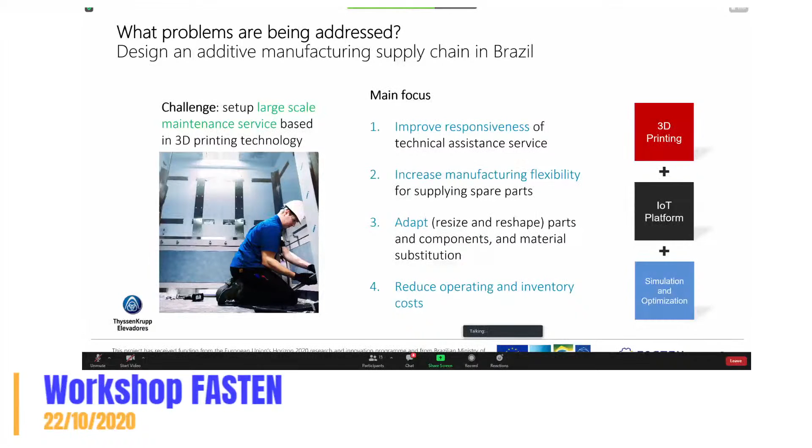That's very valuable in these times when a fast reply to client needs is essential. So for ThyssenKrupp, this is a high-level view of the problem we're addressing. You'll see in Professor Mauro's presentation a more detailed definition of the problem and the tools we're developing for them.

In the other use case, from Embraer, we have another perspective on Industry 4.0, mostly related to the preparation of pieces - the kits that will go to the production line. Nowadays this involves a balance between a human and a robotic approach.

And the different point from the ThyssenKrupp use case is the robotic picking. And you will see in detail the problem addressed for Embraer, but also the innovations from these technologies in the following presentations. So this would be all for the moment.

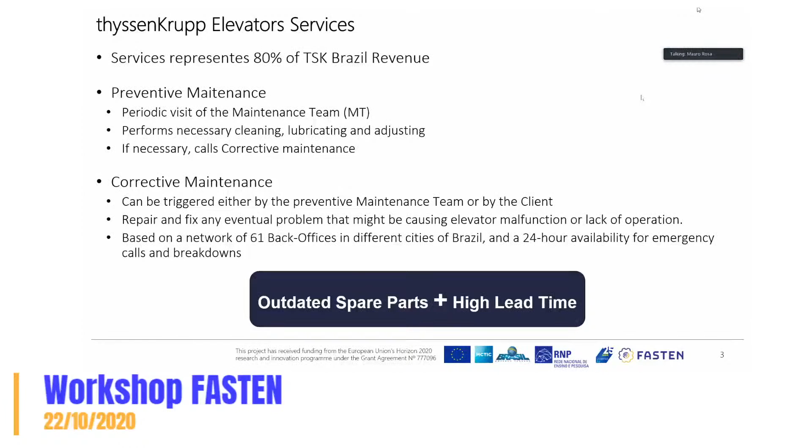Thinking about this situation, we have the FASTEN ThyssenKrupp use case. Here, it is important to present some guiding questions linked to this problem: how to develop or deploy a one-of-a-kind manufacturing system for spare parts with sporadic and erratic demand. This is one of the questions to be answered by the project. How to develop the collaborative robot capable of identifying and picking parts produced in different additive manufacturing printers. We are working with 3D printers, and I will talk a little bit about these technologies ahead.

How to develop an efficient network of manufacturing units capable of providing immediate spare parts availability. This is so important as a question, and it was one of the targets that we have worked a lot on in this project. How to integrate a network of decentralized manufacturing units capable of reducing spare parts supply lead time and costs in a big country like Brazil.

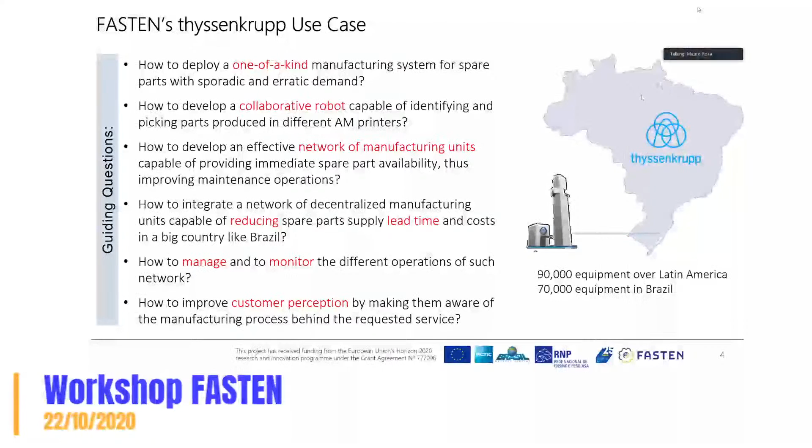Problems faced by ThyssenKrupp following this situation and FASTEN solutions. In this case, we are talking about creating and developing, demonstrating, validating, and disseminating an integrated and modular structure for the efficient production of customized products. In this situation, we are interested in constructing our solution based on these technologies and solutions that we are demonstrating here, based on 3D printers and mobile manipulator robotics. We have developed a SRAM that we will define and talk about in several parts of this event.

Open industrial IoT platform for customer-designed products. All this solution is based on this technology: predictive and prescriptive analytic tool, holistic simulator optimizer tool, and real-time monitoring and performance management tool. These are the basis of the FASTEN solutions for these problems faced by ThyssenKrupp.

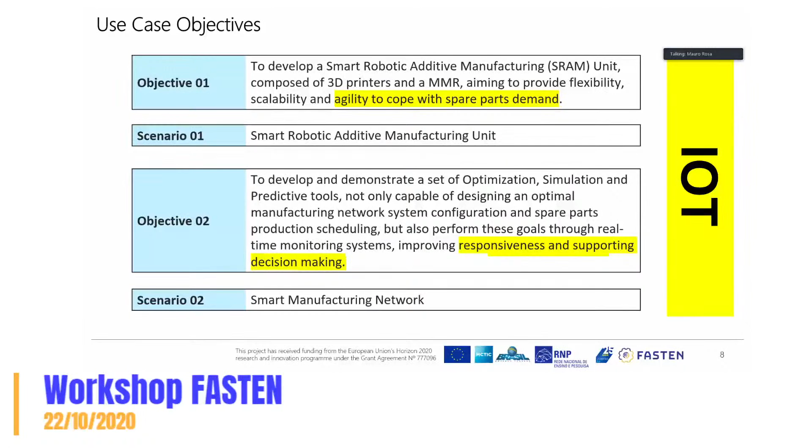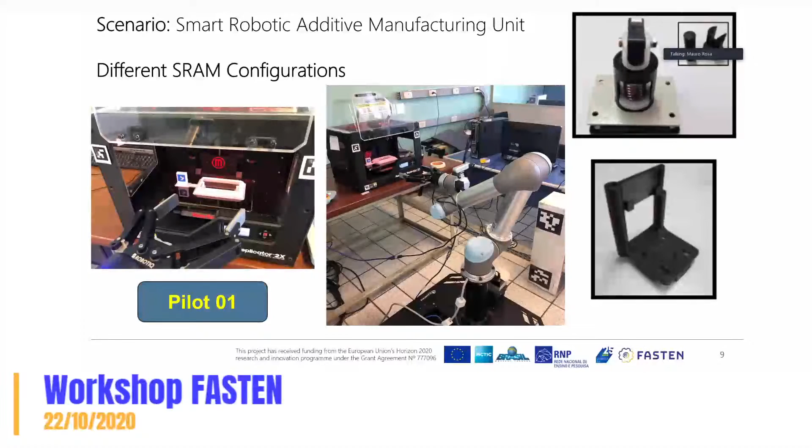And we have designed different kinds of configurations like these pictures that we are showing. Other configurations like itinerant smart robotic additive manufacturing are possible to solve the problem of lead time in big cities. We have studied this kind of solution as well, and a smart additive manufacturing in a more simple way where we don't have robotics, but we have different 3D printers to produce, and the presence of humans here is important.

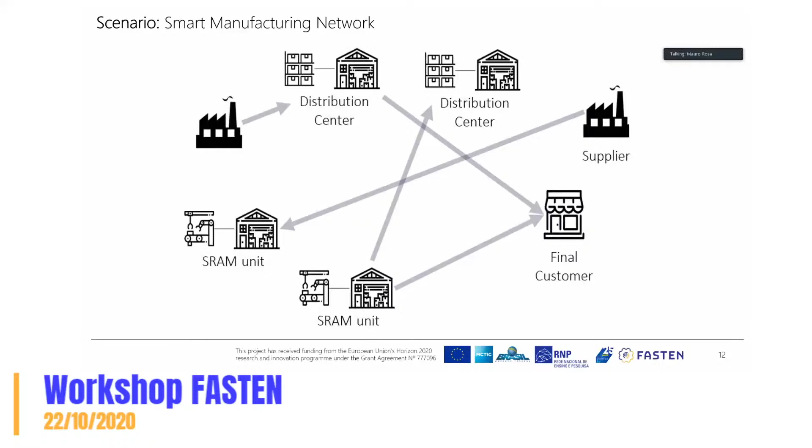The other scenario that we have mentioned during this presentation is a smart manufacturing network. My colleagues will present this situation in detail, but the basic idea here is to have different SRAM units spread in Brazil. We have distribution centers located in different parts of Brazil, and the final customer. This consists of an optimization problem, and we have constructed modules to solve this kind of problem.

In order to illustrate our developments, I have here a demonstration video, and I will ask our assistants to play the demonstration video so the people on YouTube can see it. Okay. Okay, Ariane? So, Mauro, I would like to ask you to stop sharing your screen so I can share mine. Okay.

The sound, I think, is a bit low. Maybe I can comment on some parts of the video in order to clarify what happens.

In this case, a customer has identified broken spare parts and has contacted the maintenance team of ThyssenKrupp. The maintenance man has made a request to Guaíba, where ThyssenKrupp has the manufacturing system, and they have started the process to produce the part that they asked for in order to solve the problem with the elevator. In this case, the perception of the customer is very bad because the lead time is very high.

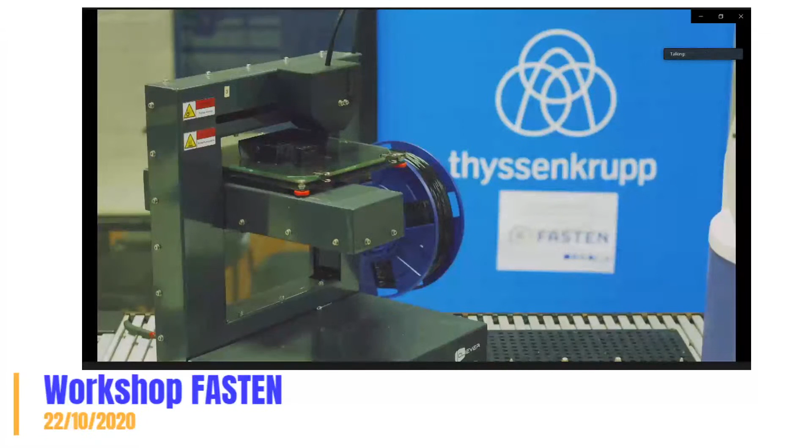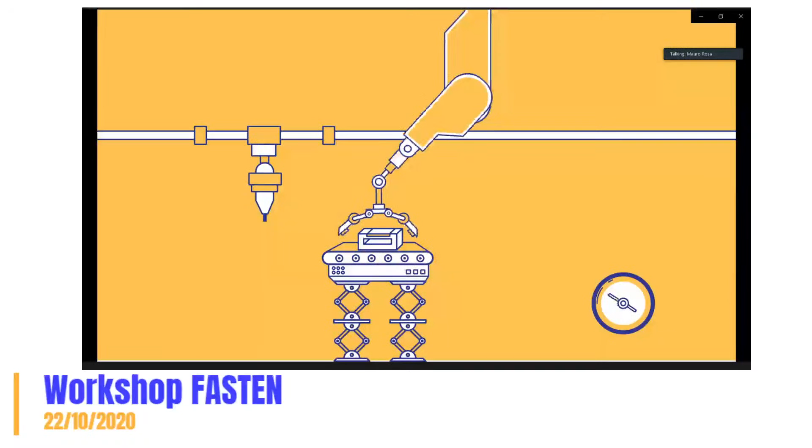However, there is a solution, and here the FASTEN technologies come in to offer another way. In this case, the FASTEN framework is used by this customer, and the process is the same: it is requested where we have the best SRAM, or the nearest SRAM available, to solve this situation. And in our example, we have reduced the lead time, and here we have a summary of the solution.

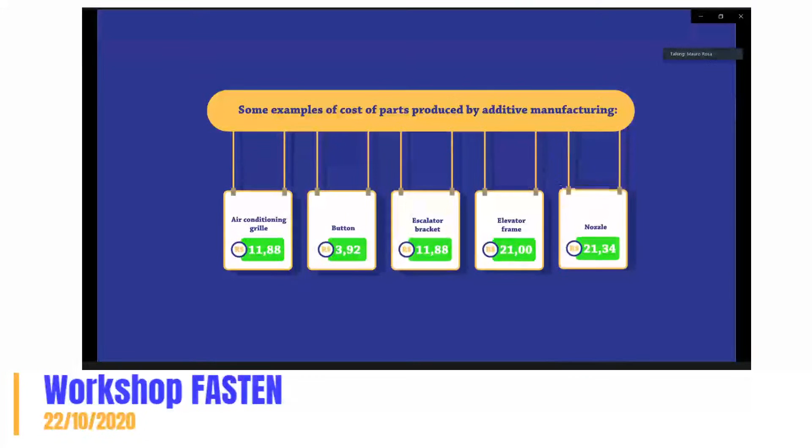So unfortunately, the quality of the video was not so good, but the main idea here is to try to pass the message that we have developed some technologies in order to improve this kind of problems in industries like ThyssenKrupp, but obviously this is not proper only for elevators. It is possible to apply this kind of technologies for different

industries and different situations. One of the main conclusions that we found during the project was that this kind of technology can improve different production schemes, and it is well adapted for different production schemes. It is important to highlight this because the project obviously used elevators in order to demonstrate our pilot. It is possible to apply it in other ways, and we are obviously open to talk about that.

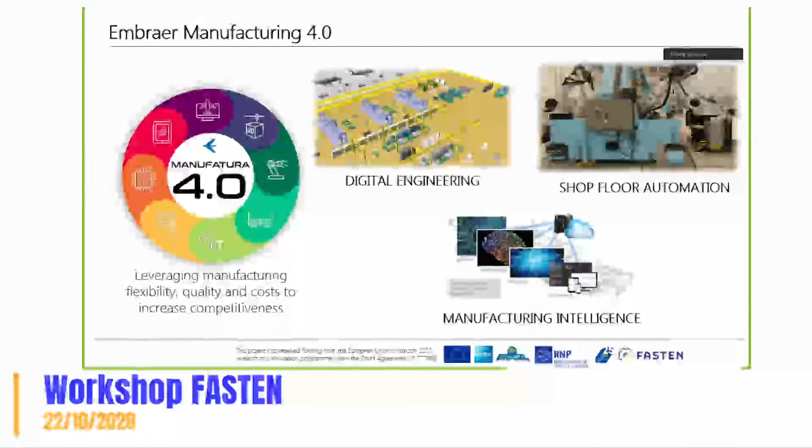So in terms of structure, Ariane has presented the overview of the ThyssenKrupp and Embraer use case, but it's important to understand that all the technical development provided for our work packages is shared for both use cases. So what I'm going to present you is how the Embraer use case addresses all these technical developments that comprise the use of the IoT platform and the applications of the holistic simulator, the predictive analytic tools, and the real-time monitoring tool, and also the work package that's related to the robotic manipulation itself. So this is the point of this presentation. Let me just move this.

Okay. So the point is that the Embraer challenge for FASTEN is based upon two different scenarios. The first scenario, we can say the adaptive pick-and-place robotic logistics, and the second one is the wing assembly line enhanced decision and management. This is oriented to our shop floor. This is the Evora plant that's represented here in this picture, and we have these two environments that we consider for this project. For scenario number one, we have here the warehouse where we store all the parts that are distributed to some specific points in this shop floor. So this is the main distribution point where we receive the components from the supply chain and distribute them to some specific parts of this line.

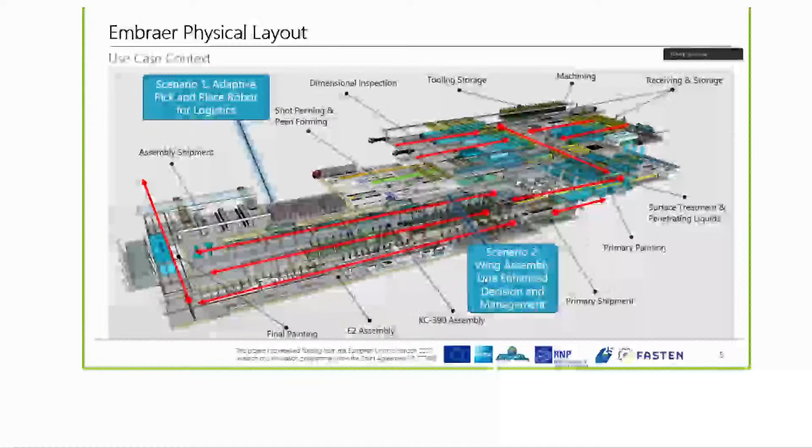Okay, so the first scenario is related to this context, how we can develop a robot that can collaborate with the operator to pick the parts that we receive in this system, and to assemble the kit that will be delivered to the assembly line. And the second one is more related to the production line, where we assemble the wings, and we have a structural process related to drilling, starting fasteners, countersinking, and in this scenario, we are aiming to have a modeling of the wing assembly line, and using some of the predictive tools for preventive maintenance. Okay, this will be further explained in the next slides.

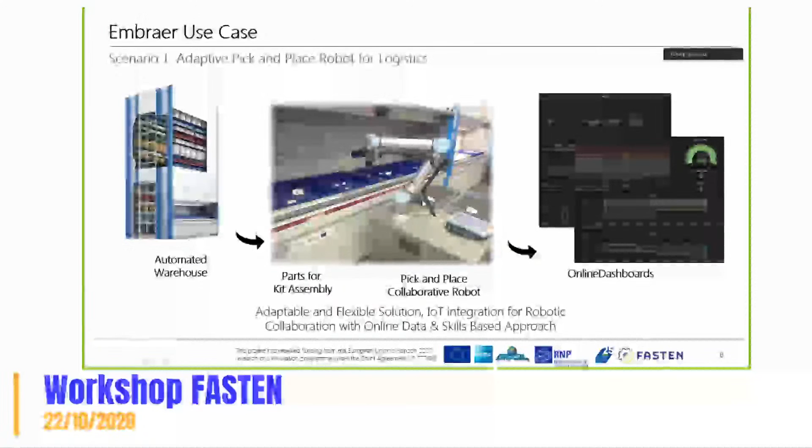So for scenario number one, what we have is the automated warehouse, and as I said, this is the environment where we store all the parts that will be delivered to the shop floor. And what we expected with FASTEN developments is to develop a robotic solution that is able to pick the parts and assemble them into kits that will be delivered to production, and providing online dashboards that can follow all this operation. Okay, this is a quick video that summarizes the main idea, and I'd like to share it with you.

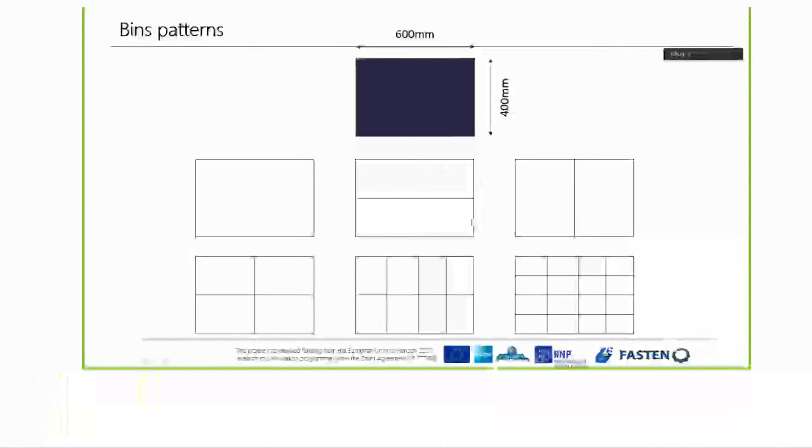So from this part to the delivery to the assembly line is the point where FASTEN is acting, replacing the manual assembly kits by this automated solution based on a pick and place robot. Just for you to know, for each box that the operator receives, these are the possible patterns that will store the components. So we have a huge variety of components stored in those boxes. And this is one of the main challenges: how we can develop an automated solution able to pick the pieces considering all these different bin patterns.

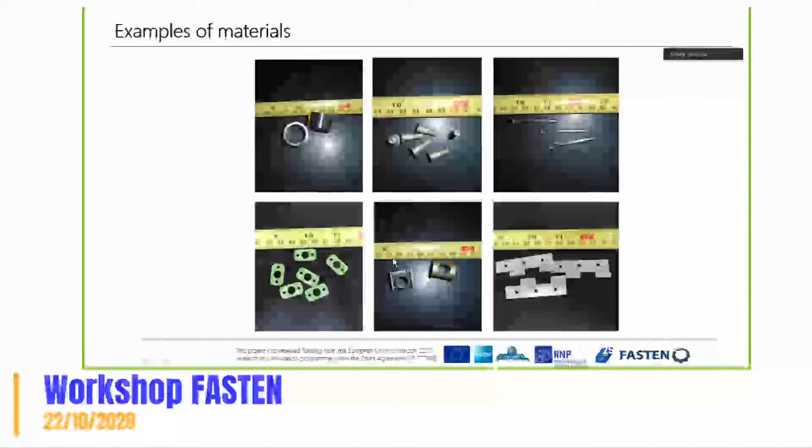Just for you to know, we are working with different kinds of components, but the main parts are small components. For example, those presented here, such as fasteners, small parts that will be assembled in the aircraft. Okay.

So the second part is related to scenario number 2, which is related to the wing assembly line enhanced decision and management, considering our structural process. As I previously said, this structural part is related to the process where we have some huge automation solutions necessary to perform operations of drilling, measuring the holes, and installing the fasteners in the holes. We have a couple of these solutions installed in our facilities, not only in the Évora plant, but also in Brazil facilities, and the processes are quite the same.

So the context here is that we perform the drilling, and the next operation is the hole measurement, where we use a measurement probe that will be put into the hole, and it will provide the information if the hole is achieving the quality requirements. The problem is that when we put this probe into the hole, it will be in contact with some oil. So we constantly need maintenance intervention to assure that this component is okay, good to be used and achieving good measurements.

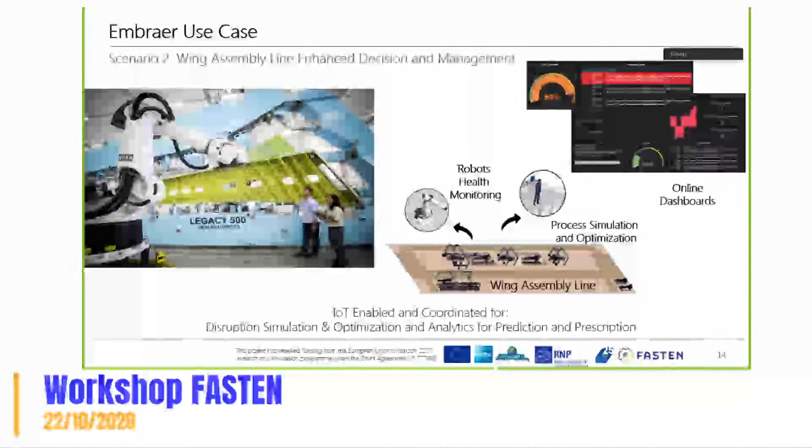So that's the point: how we can use this scenario to develop some predictive analysis to anticipate the maintenance intervention, so as not to stop the line to perform corrective maintenance in that condition. Okay. I have here a quick video that summarizes the main idea that I'd like to share with you.

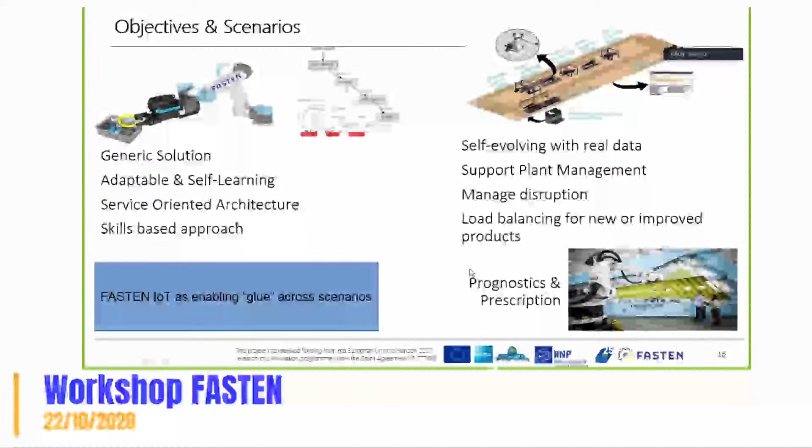FASTEN IoT is the glue, the solution that will pass through all these scenarios and deliver the results that we expected. So in terms of how we work together, the Embraer use case provides some requirements for the other work packages, the technical work packages 2, 3, and 4, related to the adaptive pick and place robotics for logistics, and work packages 3 and 4 regarding the wing assembly line decision management environment.

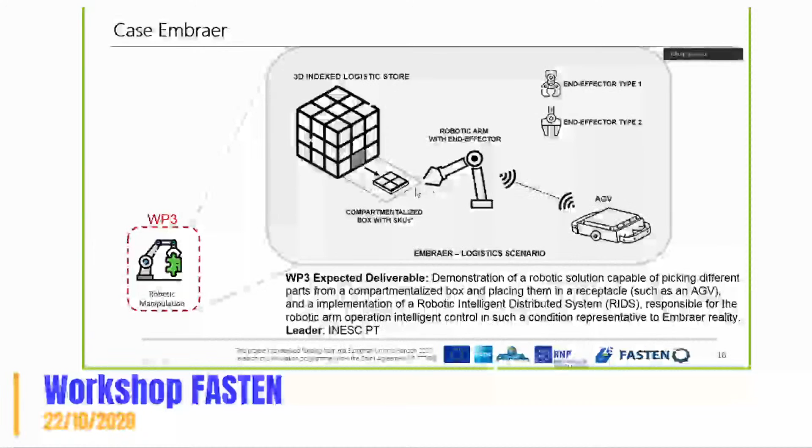So for each one, for example, for the work package responsible for developing the robotic manipulation, what we proposed is to develop different types of end effectors that will be able to be used for the different components that will be provided to that bin, and a robotic arm integrated to an automated guided vehicle able to pick the component and assemble the kits.

For work package 2, related to the open industrial IoT platform, the interface with the Embraer use case is how we can relate all this scenario in terms of acquiring data and integrating this with information related to our internal systems, such as SAP, the manufacturing execution system, and the logistics management system.

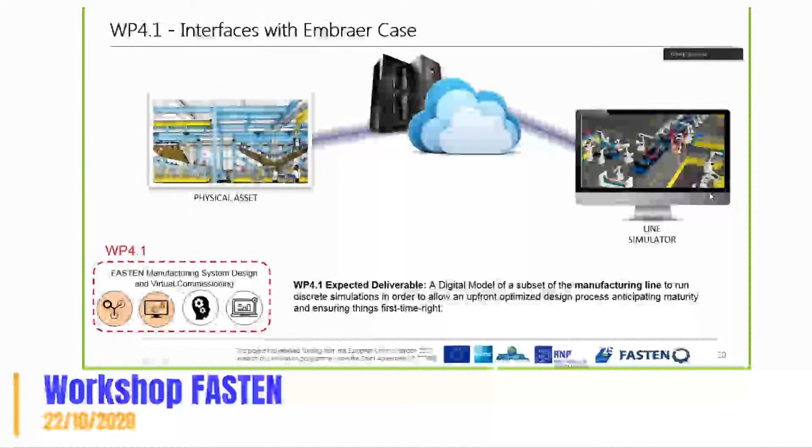And regarding the work packages related to developing the analytic tools, the expectation is how we can model the manufacturing line, considering the physical assets that we have, and how this can be represented into a simulation line representative for that scenario, that context.

For the work package related to the predictive and prescriptive analytic tool, it's how we can develop this solution, how we can develop the tools that will be able to address the measurement probe problem. How we can develop solutions that can anticipate the scenarios of the measurement probe failing.

And for the work package related to real-time monitoring and performance management tool, it's how we can provide relevant KPIs, key performance indicators, so that we can follow the operation in this scenario, in this context.

So in summary, the Embraer use case is the way we manage all these developments in terms of addressing the real Embraer environment, translated into a representative environment where we can check and validate the developments in these terms.

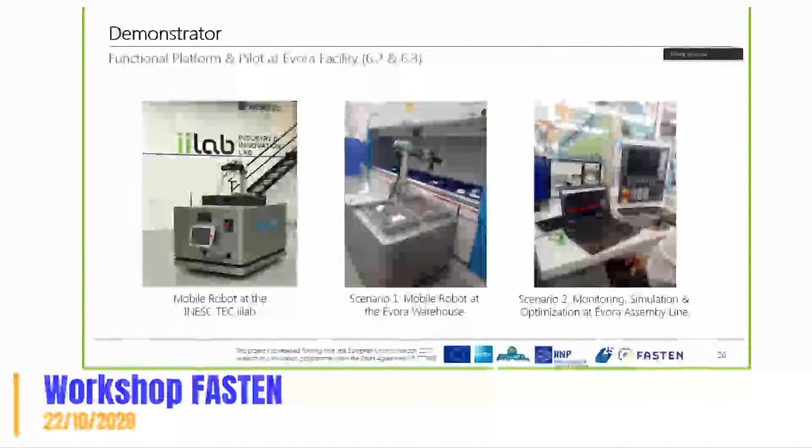And finally, the current status through this pilot's achievement: we already have a lot of knowledge, tools, and processes now available for us, not only in terms of contribution with the science itself, but also having now a huge challenge of how we can address all this knowledge, all this process, all these tools that's developed, and translate it into a technological maturity that we can use for applying this to the shop floor.

This is now what we have in mind for this part of the project for the next months: how we can internally understand what we should do, understand our process, understand our systems, and adapt them in the future to receive these technologies applied for both contexts.

Okay, and that's it. Thank you for this opportunity, and I'm now open. I don't know if I have enough time for questions, but I'm open for some comments.

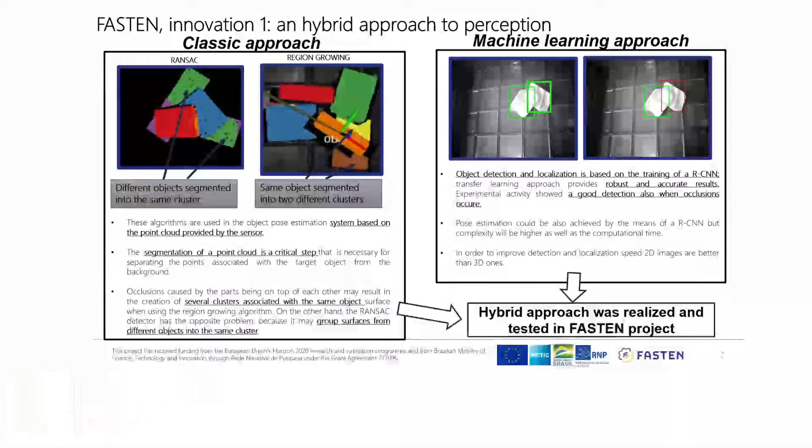So we also use another approach which is more new, related to machine learning, and specifically the use of convolutional neural networks. This is a new approach to perception, and the idea is to reuse a network that comes from big players, for example Google or Amazon, and to use it also in the FASTEN project.

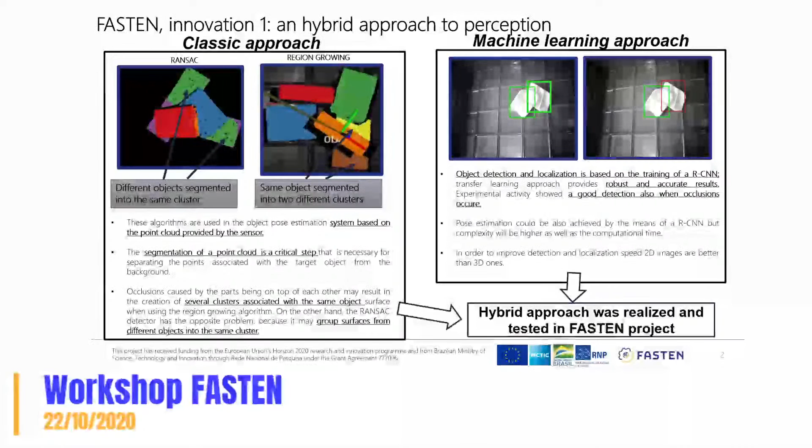But we didn't want to not use the classic approach, we wanted to merge the machine learning approach with the classic approach, because there are pros and cons. The machine learning approach requires a huge amount of data and is time consuming computationally, while the classic approach is good, easy to implement, and more computationally viable, so it is faster. So we try to merge these two ways.

Starting from the scene, we use a convolutional neural network in order to find the right object to be picked. Then we use a classic approach, for example SIFT and RANSAC algorithm, in order to estimate the pose of the object. And then after the pose, we give the position to the grasping skill to be performed.

Mainly, very briefly, we start from the scene. Using a convolutional neural network, we identify the possible objects to be picked, for example the two that you can see in the first picture. Then we mainly use an approach based on the depth information from the camera, and based on that depth information, we decide the object that is more on top in the scene, which is the best one to be picked, just using the depth information.

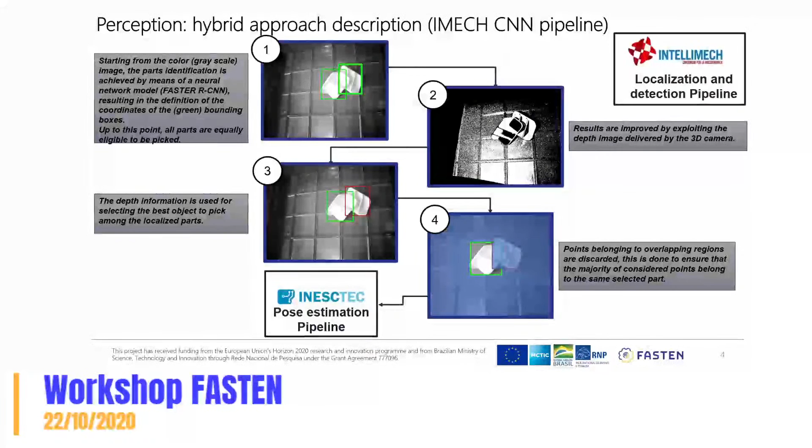And then we give to the other pipeline the best object to be picked. Then the scene is cropped only to the object that is more suitable for the picking part. Using the INESC TEC pipeline, which is based on a classical approach, only on the cropped image, it is possible to use a classical algorithm to have a good pose estimation, as you can see in the picture.

So we faced the first problem using this hybrid approach, while the other problem, as I said, is that we must have a good solution to be industrially usable in Embraer. Convolutional neural networks are a good instrument to be used, and as you see, it is possible to identify a precise object also in complex scenes. But the main problem is that to train this kind of algorithm, you need a lot of images.

So using only images without anything else, this requires an operator of Embraer to take a lot of photos of the same object, for example different hundreds of photos, and then give these photos to the network. As you can understand, this is not a good solution in industrial terms, especially in Embraer, because you must put new objects into the system that could be present in the warehouse, and there are thousands of objects. So every new object, using a traditional approach, requires thousands of photos to train the network.

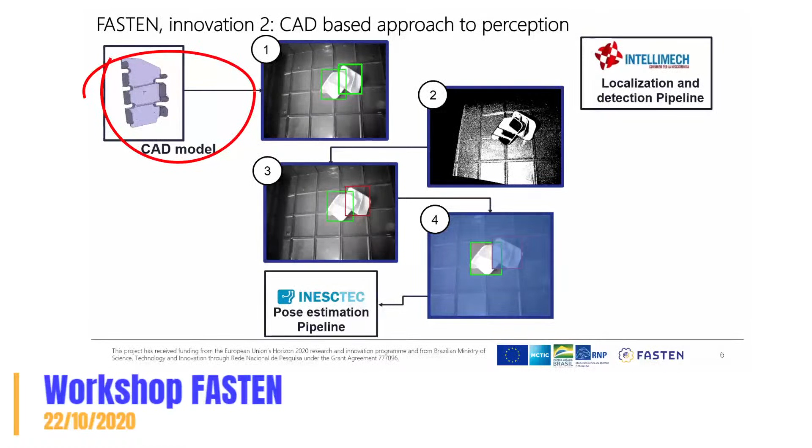So we faced this problem and solved it using a new methodology to train the network, which starts from the CAD model. The main idea is to generate virtual photos using the CAD model. This is possible by the use of a graphical engine like Unity. So we give the CAD model to this kind of tool.

This kind of tool generates different scenes, and these different scenes are virtual. Then it is possible to validate the network trained using this synthetic, virtual data. If the performance is correct, the dataset is representative. Otherwise, it is possible to reuse the same engine to train the network again using a different dataset.

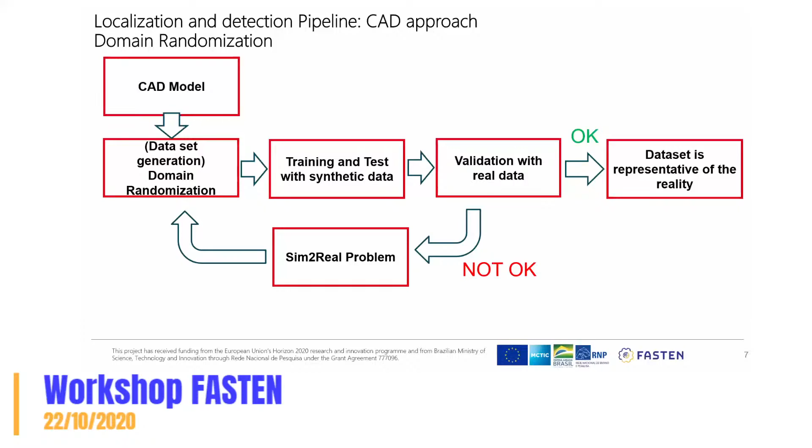Sorry, my dog is barking.

This is more or less the way the CAD approach algorithm works. We start from the CAD model, which is, for example, this multi-side bracket, and we decide which kind of distractor must be used. The distractors are objects that are not the same object we want to identify, but different objects used only to add complexity to the scene. Then it is possible inside the tool to select different backgrounds.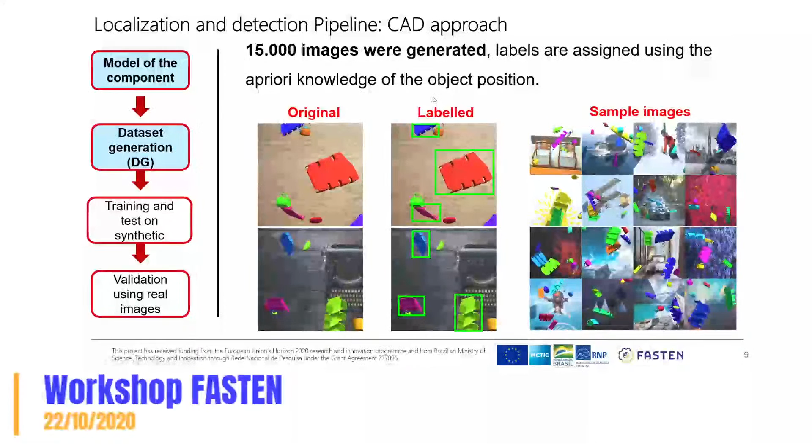So using this mix of distractors and different backgrounds, we create different images, and of course these images are synthetic. Some sample images are the ones you can see on the right, and all these kinds of images are used inside the network to train the network itself. For example, in a sample case at Embraer, we used 15,000 images, and it is not difficult to generate such a huge number of images using this approach.

Then we validated the algorithm, of course, in a real scene, and we obtained a good result because the accuracy is more than 90%, which is a very good result using this kind of approach. I can say that apart from Embraer, here in Italy and in Intellimec, we have a lot of interest in this technology because it is very, very good to be applied in industry. So this is the part of the perception.

Sorry if my dog disturbed us, but I hope that you were able to understand my discussion. Don't worry, it was a very, very illustrative, very interesting presentation, Fabio.

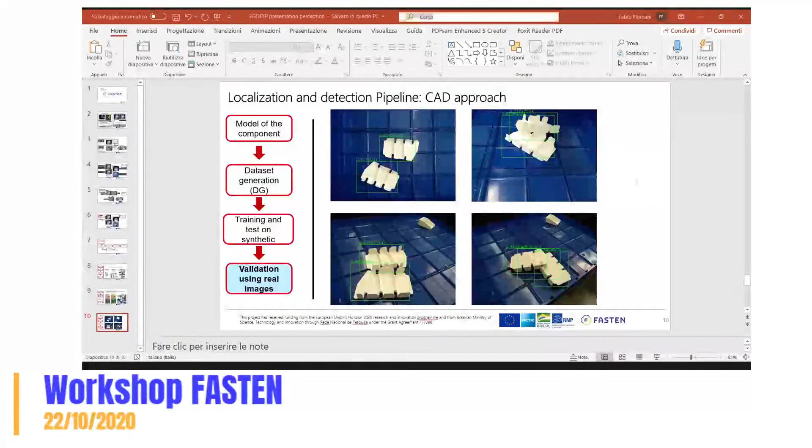Again, I'm Rafael Arrais. I'm working for INESC TEC Portugal, and I will speak to you today about the grasping strategy that we followed on the FASTEN project on both use cases, the Brazilian use case in ThyssenKrupp and also the European one in Embraer, to allow us to have a robot, a mobile manipulator, in fact a collaborative one, able to successfully pick and place objects either from the 3D printer in the Brazilian use case, or from the automated warehouse in the instance of Embraer. So very succinctly, the grasping planning strategy for the FASTEN project was divided into two different approaches.

The first one is the grasp synthesis approach, and this is an offline training procedure, very similar to what my colleague Fabio described for the visual part, but this takes into account the three-dimensional information of the objects and of the robot itself. And then the second part, the online planning part, is the grasping estimation, which takes into account the data set that we trained before, and during operation uses the same data set to perform the operation on the robot itself.

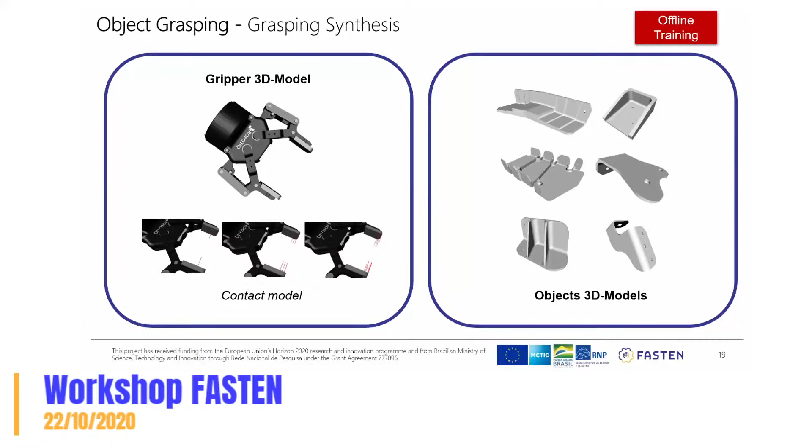So I'll start by very briefly explaining the offline part, and then we'll see how the online part capitalizes on this training model. For training our data set, we had to take into consideration the properties of the gripper of the robot, the tool that the robot uses to grasp or pick each of the candidate objects. For this, we had to map the 3D model of the actual physical tool, taking into consideration mostly its contact model, the physical properties of the gripper itself. On the right side, we see some examples of objects for the Embraer use case, where we also had the 3D models of the objects, and we took them into consideration.

I will not get into too much technical detail, but basically it is an iterative algorithm with simulation parts. It's an optimization heuristic that uses simulated annealing to try to compute which is the best candidate for a given grasping pair. In other words, it tries to find the best contact point between the gripper and the object, and it does so in an iterative way using simulation.

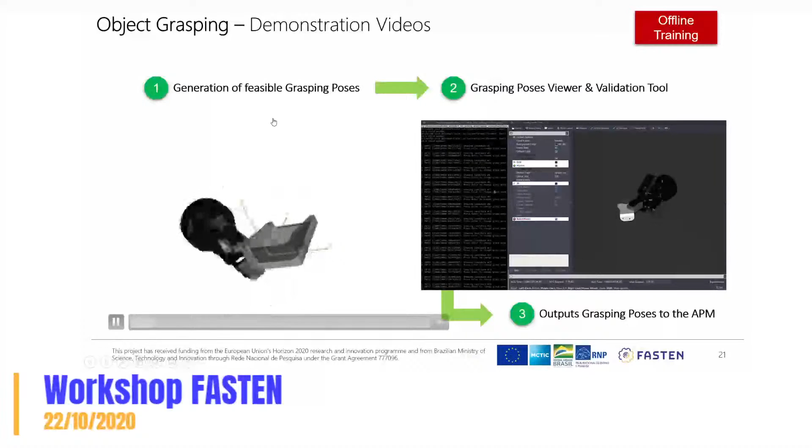In this slide, hopefully we will be able to see the videos, but basically it's the software that we developed running. In the first part we generate a very large set of feasible grasping poses. As we can see, the software is trying to accommodate the position of the gripper with the properties of the object, generating a list of grasping poses which are feasible to achieve. And then on the right-hand part, we see the actual validation of these grasping poses, which can be done manually.

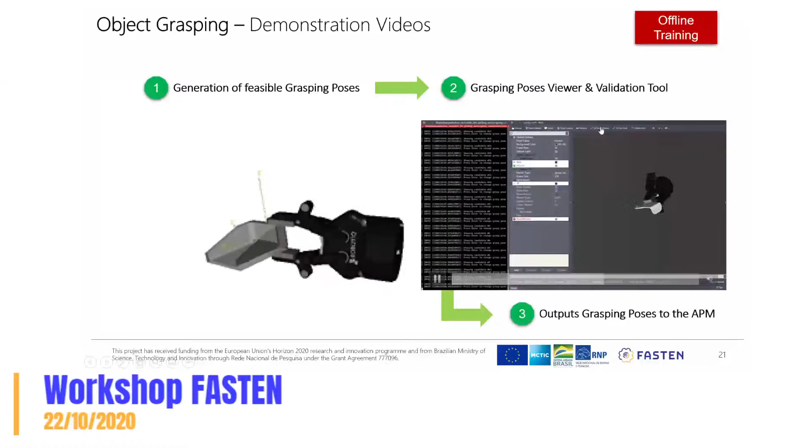And in fact, in the time of the project, we did this mostly manually, but it can also be computed automatically using a machine learning procedure currently. Finally, once we have this offline training pipeline processed, we then basically proceed with the upload of all of these possible ways to grasp the object.

We upload this to our digital twin representation, which in the FASTEN project we call the advanced plant model. And this allows all of the robots in the fleet to consult this information in real time. So according to the object that they need to grasp, and also with the hardware they have configured at the spot, at the factory, the robots are capable to consult this model and retrieve the correct information to proceed with the grasping.

And this, of course, takes place in the second part of the procedure, which is the online planning, which actually takes place during operation, as I mentioned. And in real time, the robot consults this advanced plant model, which is the digital twin represented here on the left side of the image, that stores this information. And the robot in real time, and this on the right side is a simulation of that procedure, tries to see which is the best candidate for the configuration and for the morphological location of the object in the scene.

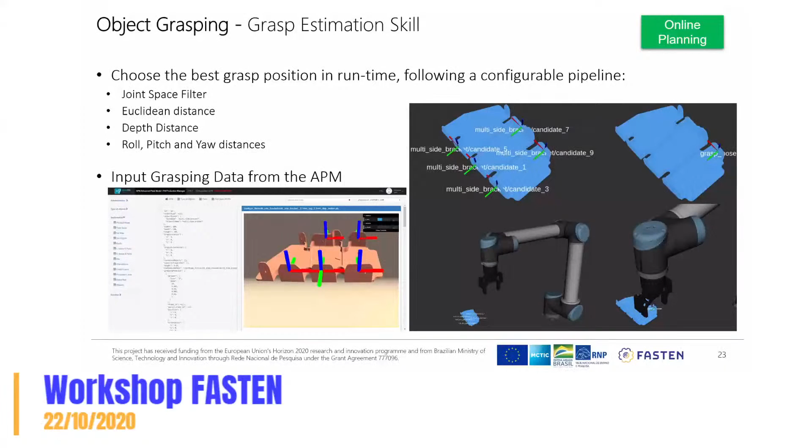Finally, to conclude, this is a representation of how this looks in real time. So there is a sequence of operations where first the components presented by my colleague Fabio before are evaluated. So basically the robot computes first which part is the part that he wants to pick. Then it computes the location of the part. And after that, this grasping estimation skill or capability is executed that allows the robot to successfully grasp this object and also compute the position where it should deploy this object to be shipped for the production part. This pretty much concludes our effort into the grasping part for the FASTEN project.

Thank you, Rafael. Now I pass the word to André Scolari for his talk. Yes. Please, André. Thank you, Enzo. 5 minutes, maybe 3. Yeah, 3 is good. 5 is good as well. So, I'll share my screen now. Okay. So, sorry. It's okay? Yes, we can see your screen. Go on. Okay, thank you. So,

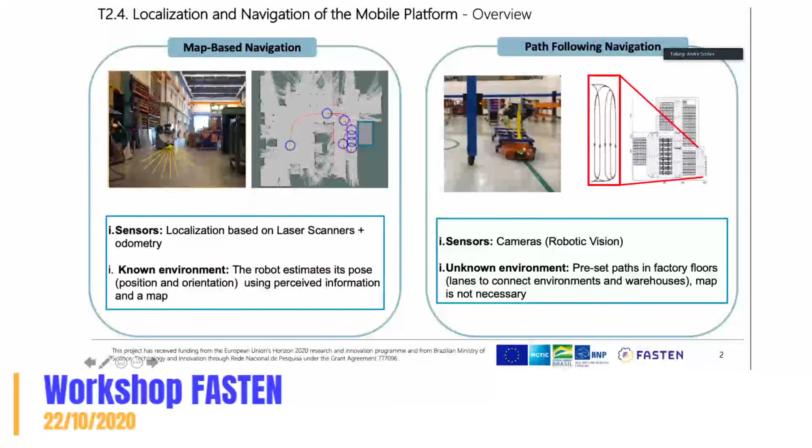Another approach is an approach using robotic vision. So it's applied to preset paths in the factory floor, where lanes connect environments and warehouse, for example. In this case, a map is not necessary. So of these two approaches, for the first one, the map-based navigation, we have used a perfect match algorithm plus a particle swarm optimization, PSO. So it's a precise algorithm based on contour detection. And the PSO is to fill the gap of perfect match, for example, for estimation of an initial pose, or for the kidnapped robot problem. So you can see in this simulation how the algorithms work.

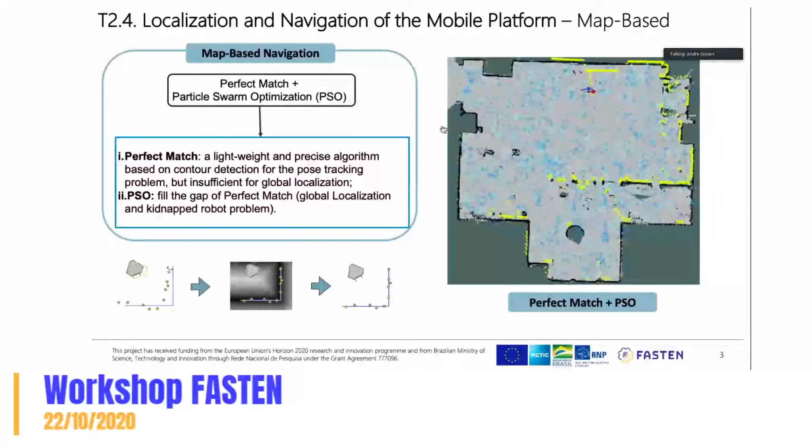And for the path-following navigation, we are using a nonlinear model predictive control. So in this case, we are using a camera to extract and detect the parameters that represent the path to be followed. And we are using the prediction concept to calculate the new reference or the new velocities for the robots. You can see the pipeline of the extraction of the path to be followed. So there is a lot of robotic vision plus control system algorithms.

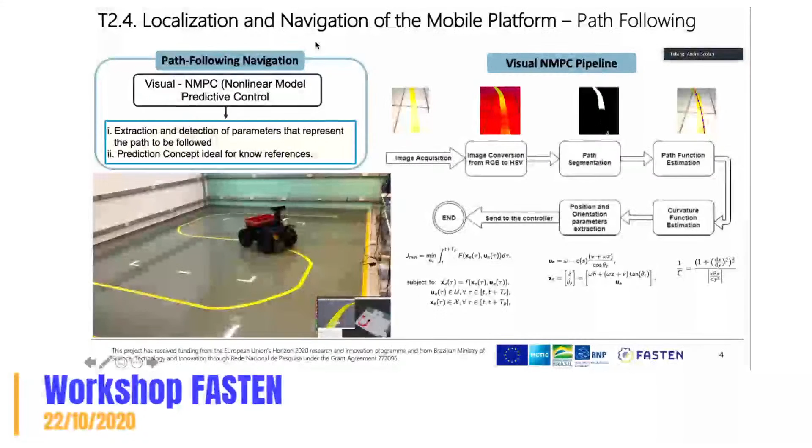And finally, I'd like to show you a video where you can see here the Smart Robotic Additive Manufacturing Unit at the Federal University of Bahia. So in this case, the mobile robot is responsible to transport the manufacturing parts to the following stage, for example, assembly or finishing or like that.

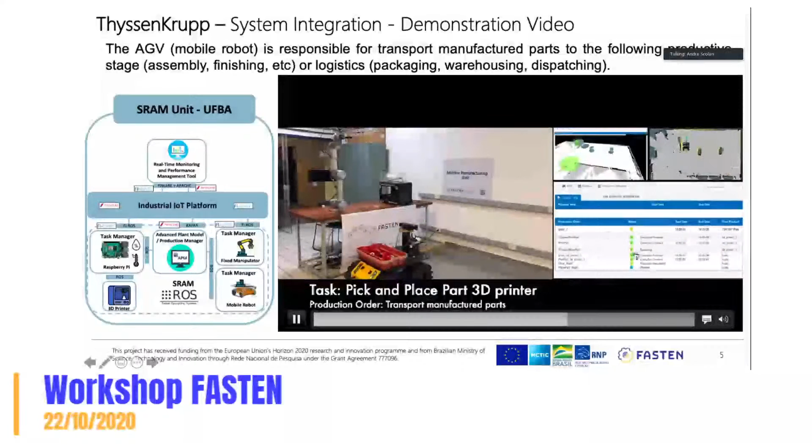And in this case, you can see the APM, advanced plant model. You can see the map and the localization of the robot. You can see the dashboard with the variables of control and to monitor some actuator, for example, the gripper. The orders are here. We can see the green lights and the yellow lights here, showing the tasks that the robot must fulfill.

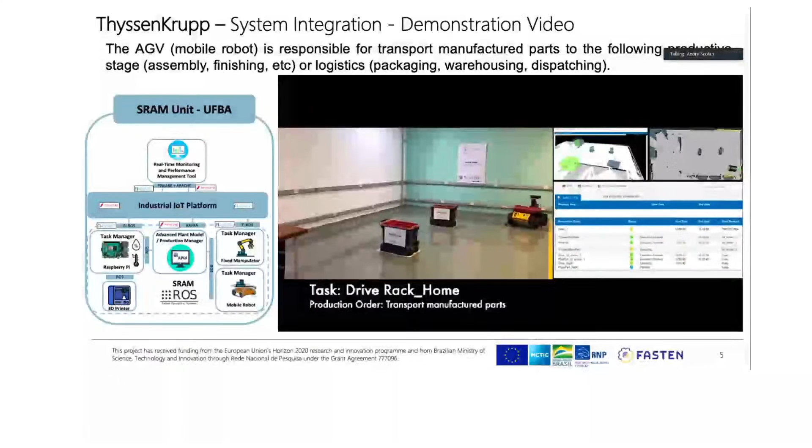Now it's my pleasure to introduce my friend Mario Dantas, who will present the Open Industrial IoT platform of the FASTEN project, the FASTEN Innovations. Please, Mario, the floor is yours.

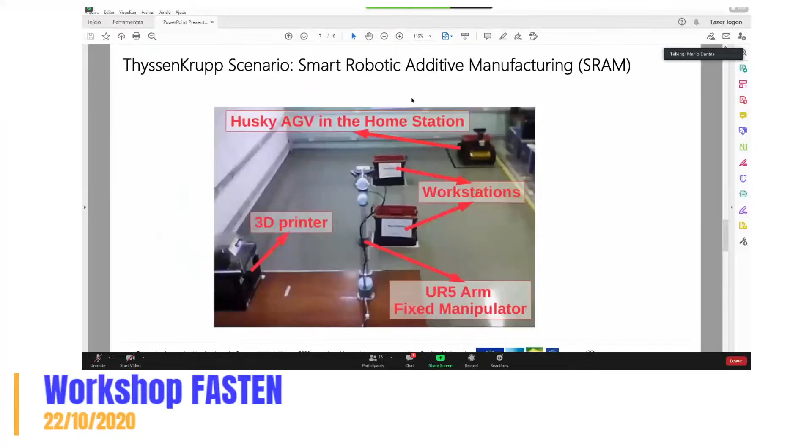So we collect this from the nice pictures that you saw, the films that you saw previously from the work practice, and then afterwards we send this, as there is a picture here, to the guys involved with the optimization. So we suffer pressure from the robot guys. I'll say, we are sending this. And the guys like Enzo, like Simone, want to do their simulation, so we can do this backwards in the proper way. Okay, and I'm very happy to be part of this group.

And the processes are more mature, and the IoT platform, we can say that we learned a lot. And you must understand that was a joke before. The IoT platform is discussed around the world, because there is an IoT organization trying to standardize all the devices that we are utilizing in the industry, in the real industry.

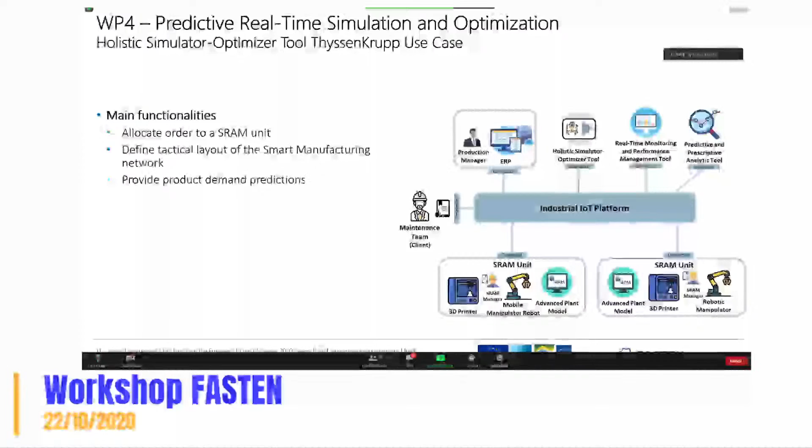In the first functionality, we want to determine the best place to print or allocate an order. We use optimization algorithms to do this work, in particular some heuristics with local optimization. This optimization algorithm implements an objective function which minimizes the total response time of the order. The main components in this objective function are the travel time, queue time, production time, and setup times. We also use forecasting models to determine the production times.

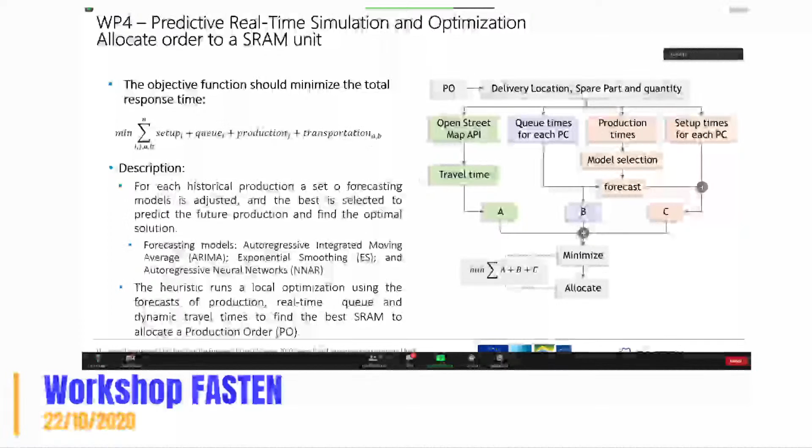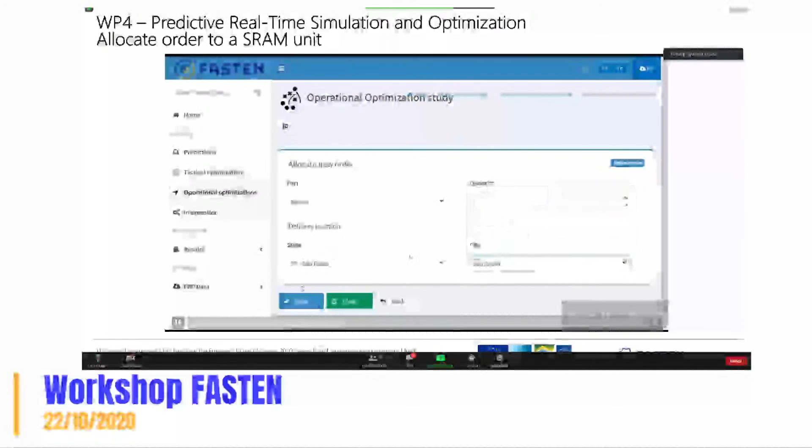This video shows how the software to allocate an order works. We should create a new study, which we call the operational optimization study, to perform this functionality. The user must select the part to be printed and the number of spare parts, and also the delivery location of the order - that is, the location of the customer. Then the user must save this study, and the user can execute this study to run the optimization algorithm. The user also has access to all studies that are running in the background.

To implement this optimization algorithm, we use R language and also Open Street Map API to determine the travel time. When the optimizer finishes, the user is notified and can access information on the best places to print a specific order. In this case, the algorithm has ranked the best 5 places to print a specific order in Brazil.

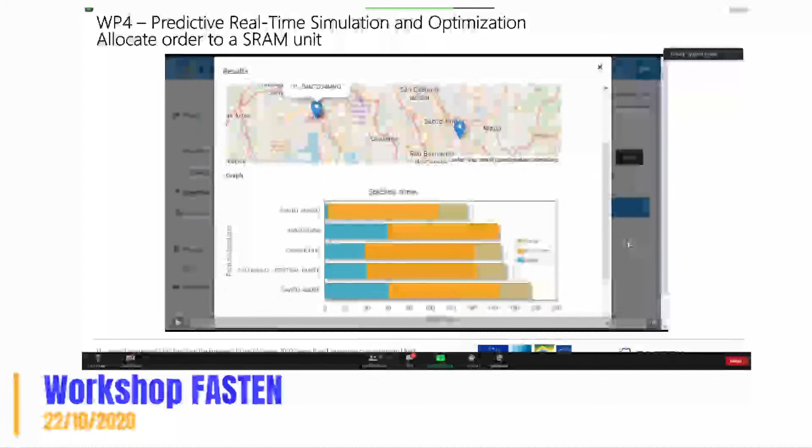The second functionality aims to define the best layout of the supply chain. Here we use algorithms such as the P-Median and an optimization algorithm called mixed integer linear program models. The objective function of this model is composed of installation cost, transportation cost, and production cost, and the main objective is to minimize this function.

These images are screens of the software that is able to determine the best layout of the supply chain. First, the user must create a new study with information about the historical demands of the whole supply chain, and also input the number of candidate cities to install the 3D print units, along with other information on the costs of the supply chain. Then the algorithm outputs a screen with results, showing the best cities to install the units, and also information about how many 3D printers should be allocated in each city.

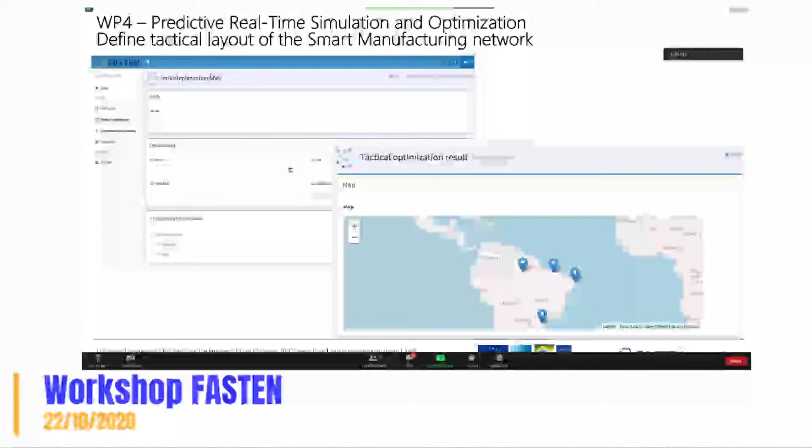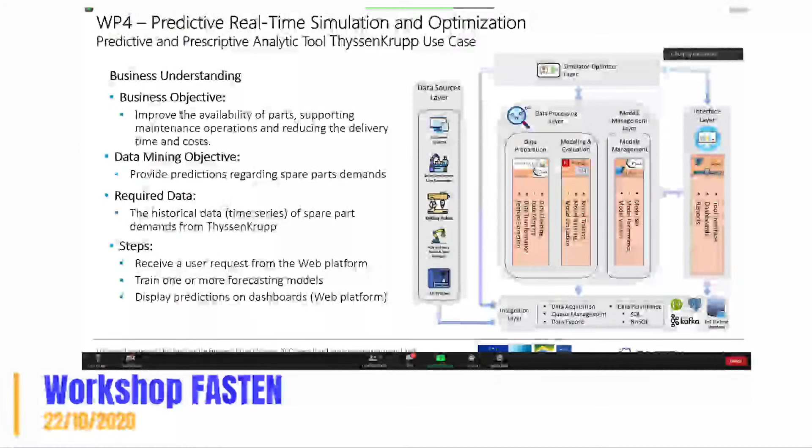Regarding the other functionality, the main objective is to provide predictions about spare parts demand - to determine how much spare parts will be needed in the future. We use a pool of forecast models, each with specific characteristics and the ability to deal with data with different characteristics. This image shows how this functionality works in the FASTEN suite.

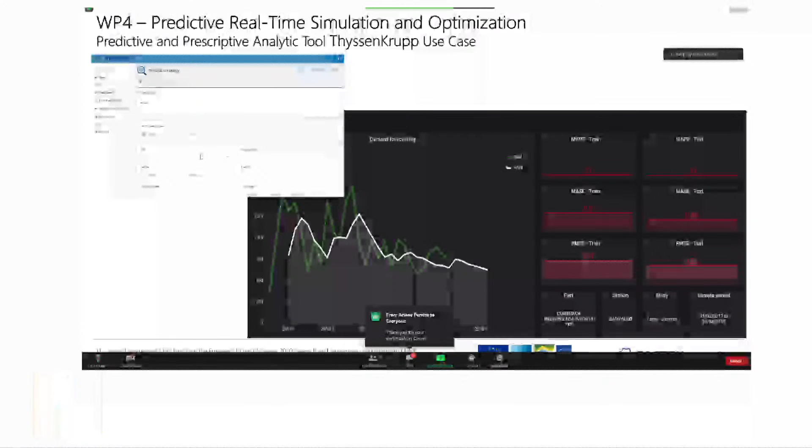For the user to access demand forecasts, they must input some information. For example, the user must input the historical demand of the spare part they want to forecast, and also the strategy of model selection, whether automatic or manual. In automatic mode, the software selects the best forecast model; if the user selects manual, they will select specific models for forecasting. In this form, the user must also input whether the predictions are regarding annual, monthly, weekly, or daily demands.

When this form is saved and the algorithms finish, the software outputs a screen developed on Grafana with information about the forecasts of a specific spare part, and also information about the errors of the trained forecast models.

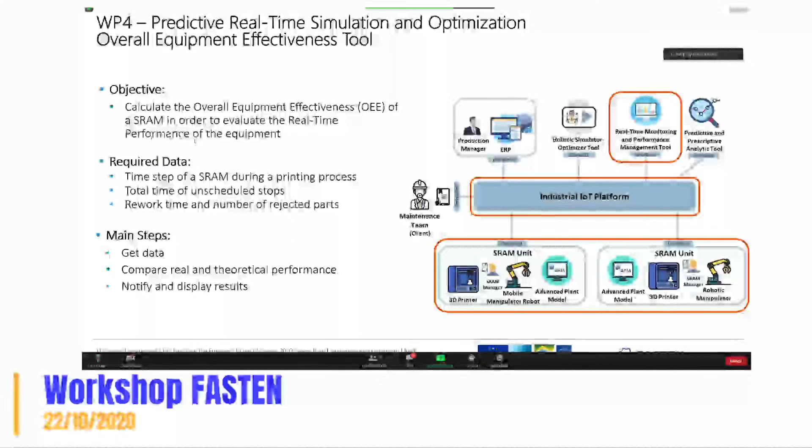Other functionality we worked on in the project is determining the overall equipment effectiveness of a specific SRAM, in order to evaluate the real-time performance of the equipment. We developed this tool, and this image shows a dashboard of it. Here we have information about the overall equipment effectiveness of S1, composed of the efficiency, availability, and quality of the equipment, as well as some other KPIs of the equipment in S1.

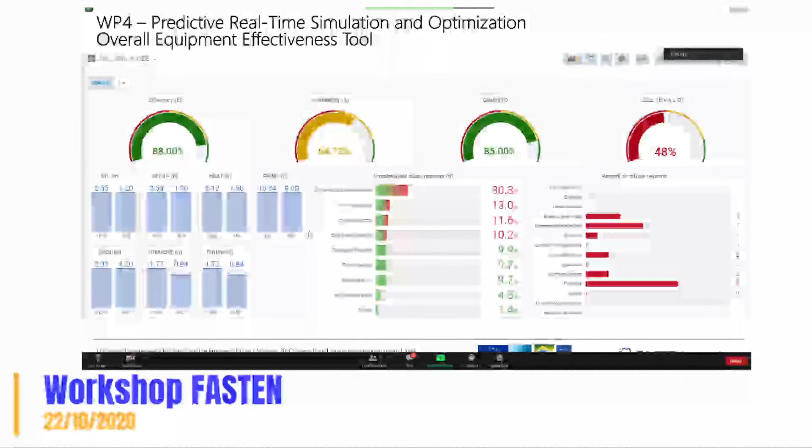This is all about the ThyssenKrupp use case. Now Narciso will present the Embraer use case. Thank you so much.

Can you see my screen? Yes. Is it the slider as a whole, or the presenter viewer? It's the presenter viewer, not the whole screen. Let me disconnect the other screen. Sorry. Now it's done. Okay, now it's okay, sorry about that.

Focusing now on the Embraer use case, this was focused on the wing assembly line, where wings for some airplanes are manufactured. Three main scenarios were defined for this use case: the first is provide best date for maintenance event, the second provides scenario analysis to support line balancing, and the third is load balance for new product or product change.

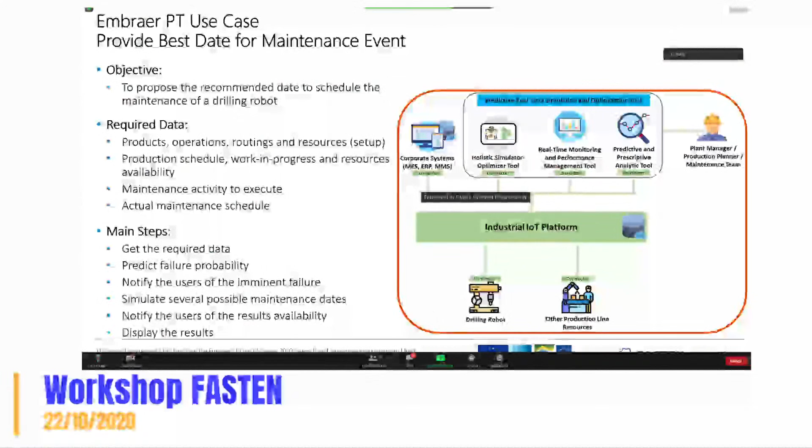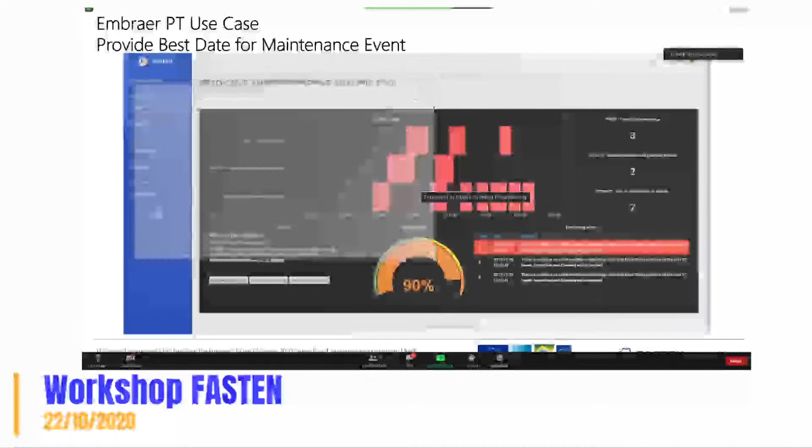Here we are seeing the predictive and prescriptive analytic tool, where we have critical alarms being sent through the IoT platform, and the analytic tool trying to predict the failure probability of a robotic resource. When it achieves more than 80% failure probability, an alarm pops up on the application, as well as an email notification to the pertinent users who should be notified of this imminent failure of a resource. The holistic tool then starts running automatically.

The tool will calculate a series of time slots to execute the maintenance activity, then simulate each time slot on the simulation model. In the end, the date with the best productivity will be selected.

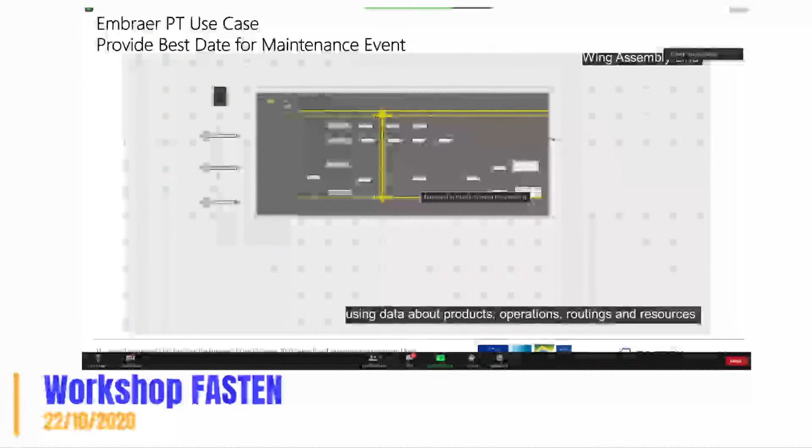Here we can see the simulation model. This runs in the background when we do a run of the holistic tool, but for presentation purposes we're showing it here because this model has a lot of logic and work in it. As you can see, we have the layout of the system.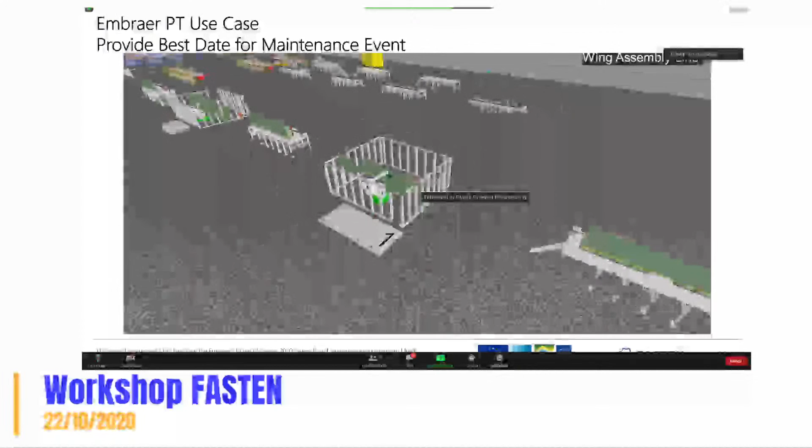We have different types of workstations: ones where human operators do the tasks, but also the robotic workstations. We have different types of products, variations of the wings for example, and also, as I said, the human operators working on a wing at a workstation.

After the holistic tool finishes running, a notification on the application is sent, as well as another email notification to the same users to notify them that the results are available.

Here inside a run, we can see the results obtained, the decisions that were made, also the layout that was tested, and of course we have the key performance indicators obtained by this run of the simulation model with the choices that the optimization made.

So the second scenario has the objective to propose the task allocation to workstations and resources, and also the resource allocation. This is a decision in the short term, for example between shifts. Here we are using the same components as before, minus the predictive prescriptive analytical tool.

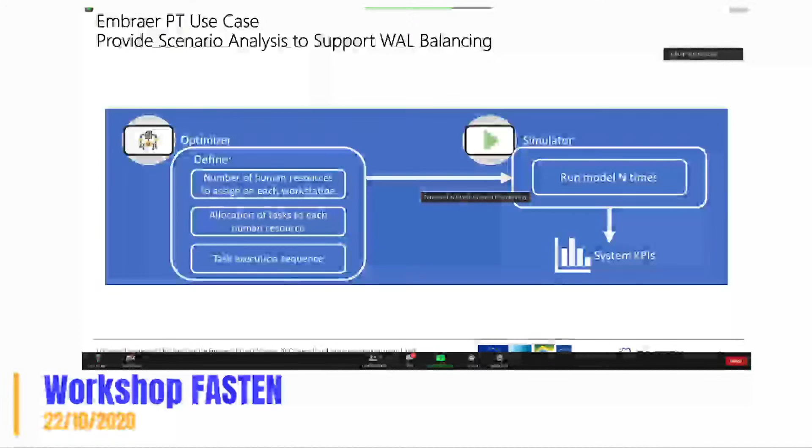These decisions will be fed into the simulation model, which will run a series of times, and then give the results to the monitoring tool, where they will be listed and accessed on the same pages, like in the demonstration of the previous scenario.

The last one is load balance for new product or change. This is a long-term decision scenario, because here we are basically deciding a new tactical layout. The objective is to propose the number of workstations, the number of resources needed, and the task allocation and sequence. Here we'll need data related to the products, operations, the types of resources needed to execute such operations and tasks, and also production forecast.

So we know how the system will need to perform to achieve the objective of this demand, of this forecast.

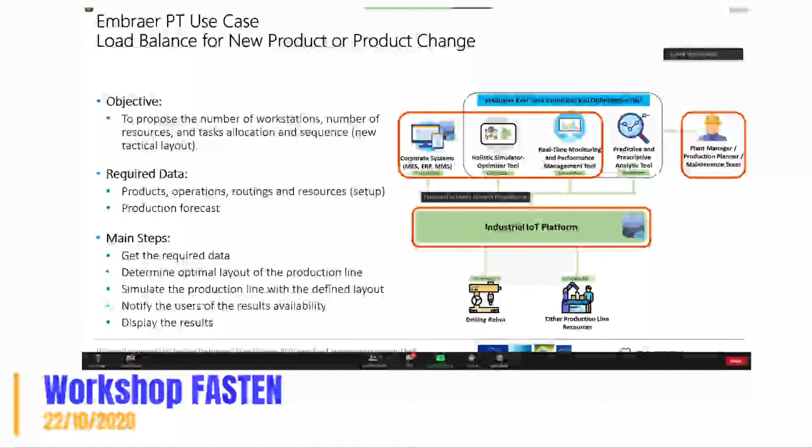Here we are not using the predictive and prescriptive analytical tool, but we are using the other tools like in the previous scenario. Here we have a diagram of the decisions that are made.

First, the optimization will decide the number of workstations that are necessary. We'll allocate the list of tasks that need to be executed in the product to the workstations. Then the number of human resources for each workstation will be decided, followed by the allocation of tasks to the resources, and in the end the task execution sequence will be defined.

This information will be passed to the simulation model, which will run a series of times, and will send the KPIs to the monitoring tool, where they will be accessed in the application.

So we conclude here our presentation. Thank you.

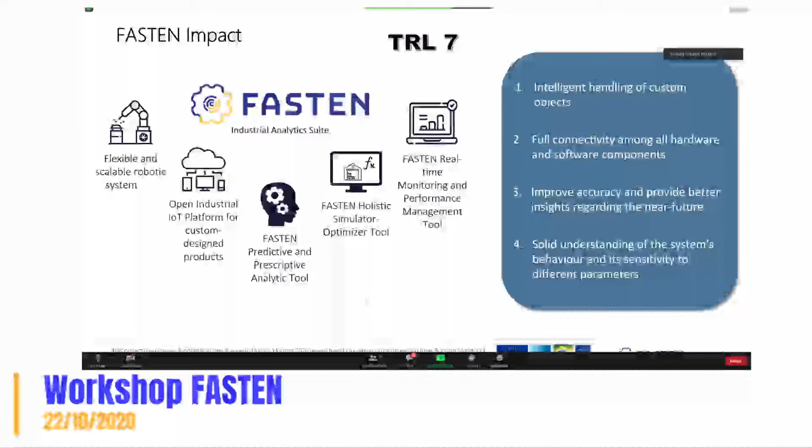And also with these developments, we can provide them the means to have a better understanding of the system's behavior, and also some more insights in terms of customization of the parameters that we can implement in the developments that we made. So this is a general perspective in terms of the impact of FASTEN. Sorry, I'm going the wrong direction.

And I'd like to say some words about innovation and dissemination. When we talk about innovation, you could see that we are talking about an invention that has a commercial value and has reached the market. And for this invention to reach the market, an R&D project needs to be disseminated.

And this dissemination will support the further use of these innovations. And this can only be achieved by a collaborative development. In this case, we are working in a two-sided project. On one side we have the EU, on the other side we have Brazil cooperation. So it is a both-way collaboration. And then we have the knowledge transfer.

You could see that we have several speakers talking here, and we have speakers from Brazil, speakers from the EU. We have speakers that work in the IoT field, others in simulation and optimization. So in a multidisciplinary project such as this one, FASTEN, we had a lot of things happening in terms of knowledge transfer that helped us to achieve the results that we are happy to be achieving by now.

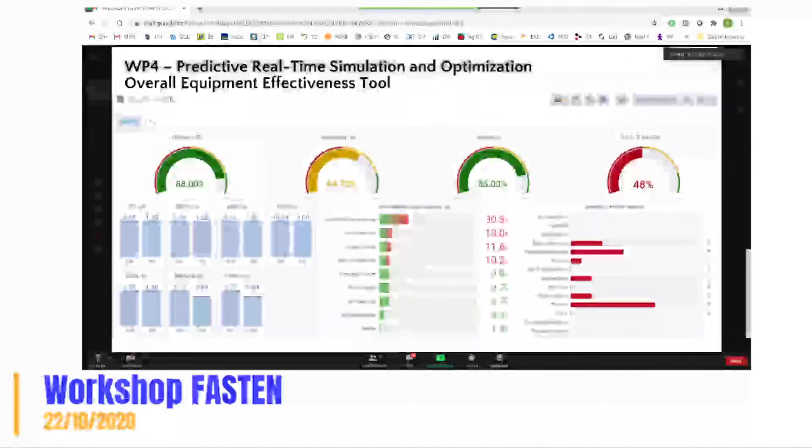the answer. Roberto, please. Yes, Professor Enzo and Gleverson, in the ThyssenKrupp case, we are finishing a tool for measuring some KPIs using the approach overall equipment effectiveness, OEE, that is very used in industrial environments. Maybe I can share my screen quickly. So you can see. Can you see? Yeah.

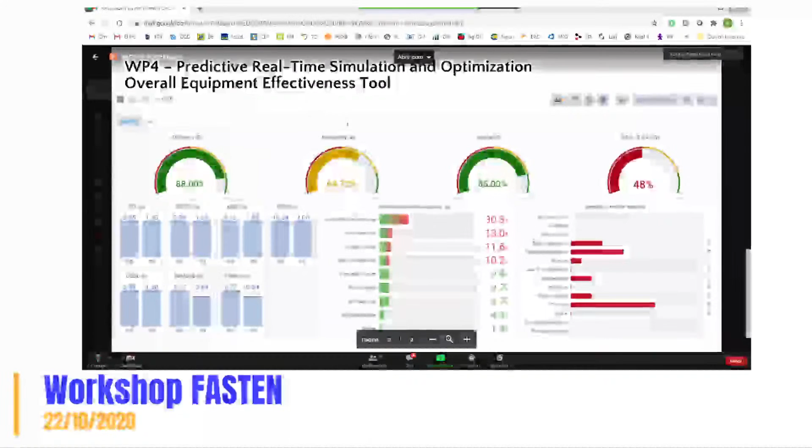Yes, it's not finished in October, and in the next 10 days, we will finish this tool that is under work package 4. So we can measure efficiency, availability, and quality in production lines. Okay, that's very interesting. It's a new tool at the end of the project that we saw is very interesting for industry, and we will present it in the next meeting of the project.

And Gleverson, if you're free to ask about this in the next workshop, maybe it can be used also in the production lines of Embraer. Okay, this work was not defined since the start of the project. After three years, we intended to put this in, and we presented it in the last meeting of the FASTEN consortium.

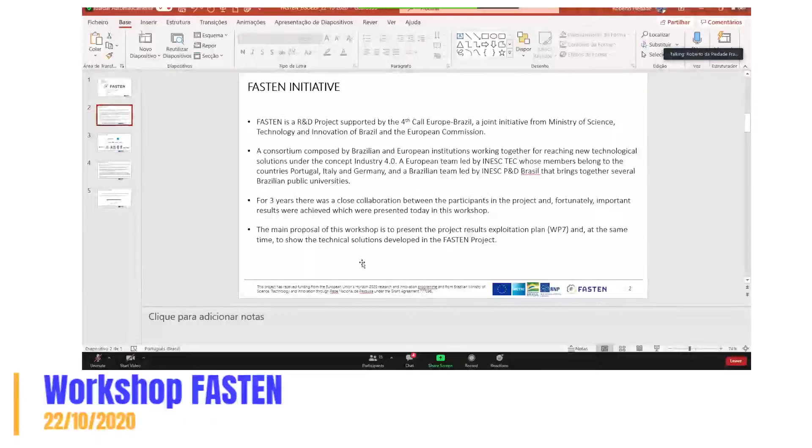So I'm Roberto from Federal University of Goiás, and I am director of INESC P&D Brazil, and I'm very happy for this dissemination workshop of FASTEN project. Remember that FASTEN is a research and development project that is supported by the call Europe Brazil. That is a joint initiative from the Ministry of Science, Technology and Innovation of Brazil and the European Commission. This consortium composed by Brazilian and European institutions work together for reaching new technological solutions under the concept of Industry 4.0. The European team was led by INESC TEC, whose members belong to countries such as Portugal, Italy, and Spain. And the Brazilian side was led by INESC P&D Brazil, that brings together several Brazilian public universities.

During 3 years, there was a close collaboration between the participants for the Brazilian side and European side. And fortunately, there were very important results achieved, and we could see these results today in this workshop. The main proposal of the workshop is to present the results exploitation plan of the project FASTEN, and at the same time show technical solutions developed in the FASTEN project.

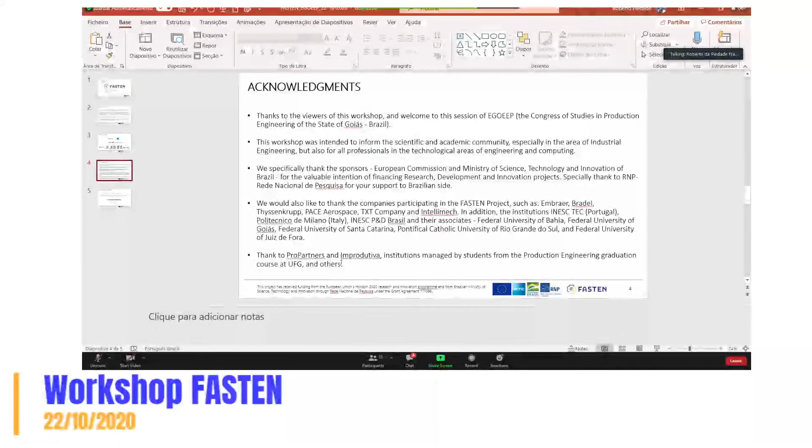So the FASTEN Consortium invites everyone to collaborate in exploring the results of the FASTEN project, and we are available to discuss with institutions, universities, companies, and researchers about the FASTEN results.